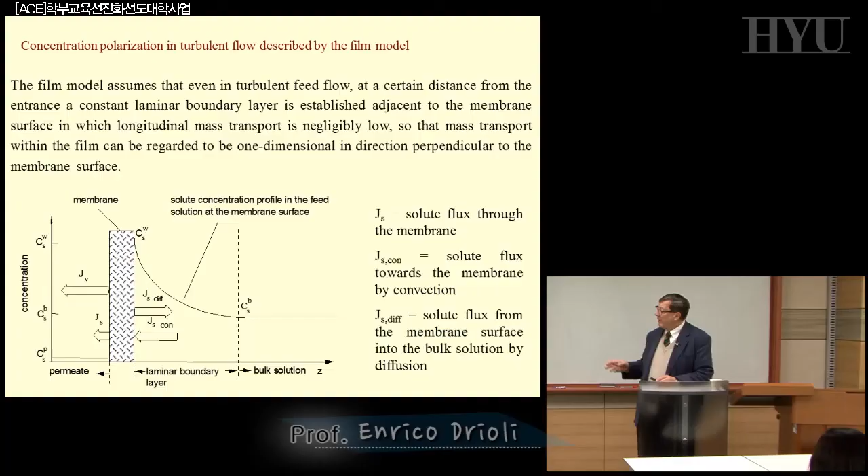We discussed last time the concentration polarization phenomena. We discussed concentration polarization in pressure-driven operations: reverse osmosis, ultrafiltration, microfiltration. Remember that this kind of phenomena is present in any membrane operation.

They can be different in mechanism, they can be different in the kind of phenomena, related to concentration polarization or temperature polarization, but there is no membrane operation in which we can neglect this kind of problem at the interface. We will discuss it also in electrodialysis, in fuel cells, for example, where sometimes people don't consider it. We always have phenomena at the interface which can be very significant and kill the efficiency of the process if you don't try to control them.

We saw that this system can be analyzed in different ways. There are some approximations when you want to solve the problem, and the traditional approximation is the film theory, in which we assume that a kind of stagnant film forms at the interface, and only at a certain distance will we have the traditional bulk concentration. In this region, we will have a linear change in the concentration across the thickness of the boundary layer.

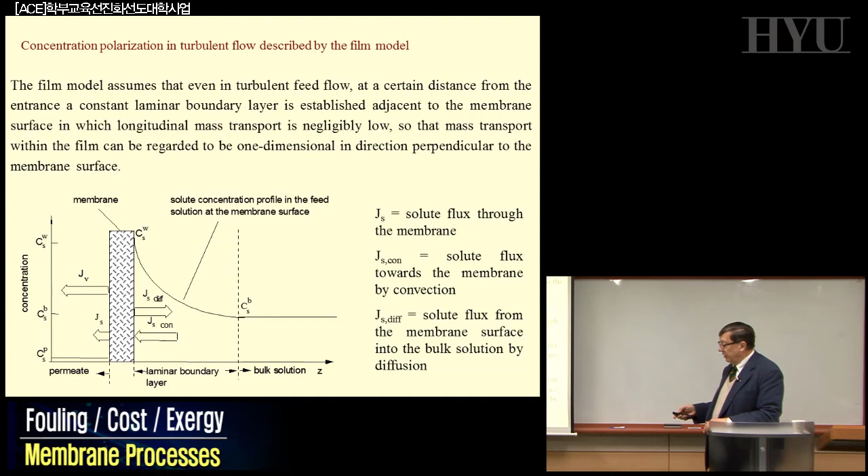We already considered that this kind of problem can significantly affect the performance of your membranes, for example, changing the transmembrane flux significantly. The experimental results show that if you change not the pressure, not the driving force, but just stirring, just mixing the solution better, the transmembrane flux can change significantly. So without changing membranes, without changing driving force, the transmembrane flux can be very different depending on how you control interfacial phenomena. That's a typical example.

By the way, this is the effect in terms of transmembrane flux. But keep in mind that when you are forming a film at the interface, the selectivity of the membranes can also be modified. So it's not only the transmembrane flux, but the overall performance of the membrane, including selectivity, that can be totally different. So these phenomena are quite important, and we have to learn how to control them.

We already discussed that if you neglect any problem related to osmotic phenomena, assuming that the formation of the boundary layer and eventually of an additional film on your membranes, physically a gel or a cake layer, you can assume in a first approximation that the osmotic pressure can be neglected. This additional film does not affect osmotic pressure, which is an approximation that cannot be real in many cases.

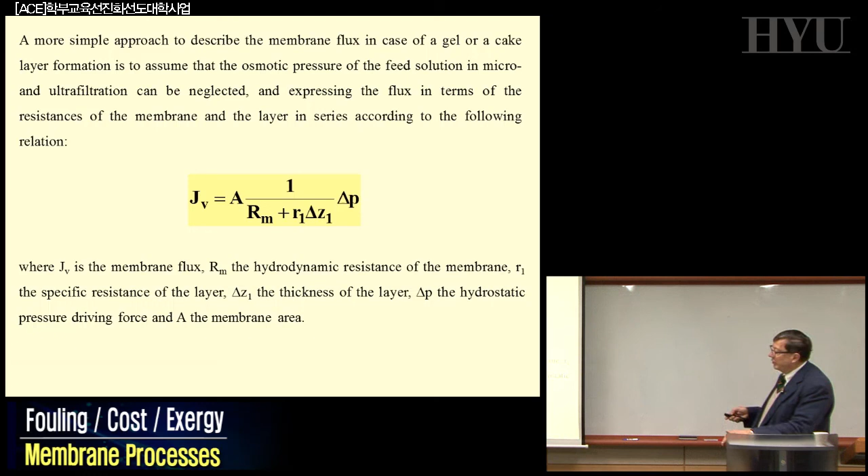This is a relatively simple equation, similar to equations people used in traditional filtration systems, a modified Darcy law, and on the basis of this equation you can recalculate the transmembrane flux and predict the interfacial concentration, etc. The only thing to consider is that, relative to the initial membrane with no cake formation or gel deposition, the new membrane is this one. So you are creating a new membrane where the intrinsic resistance Rm we saw before is no longer the initial one, but you have this additional film.

In this case, again, you can neglect osmotic phenomena, but this is an approximation because the film you are forming can have much more rejection, for example, also for some of the small components in the solution. So the initial membrane, if it was microfiltration or ultrafiltration, had no osmotic problem because everything was going through. But when you create something new at the interface, it can have some selectivity, rejection, also for some ions. So in this case, you can have an additional phenomenon of increasing ion concentration.

You can create this new concentration polarization, which is different from the initial one, and this can have osmotic effect. This seems to be simple. Many plants have been installed years ago in ultrafiltration, for example, that were not running correctly in the dairy industry for this kind of phenomena, because people were not able to predict the selectivity that this kind of gel formation related to some protein in the milk ultrafiltration was creating at the interface, inducing additional osmotic phenomena.

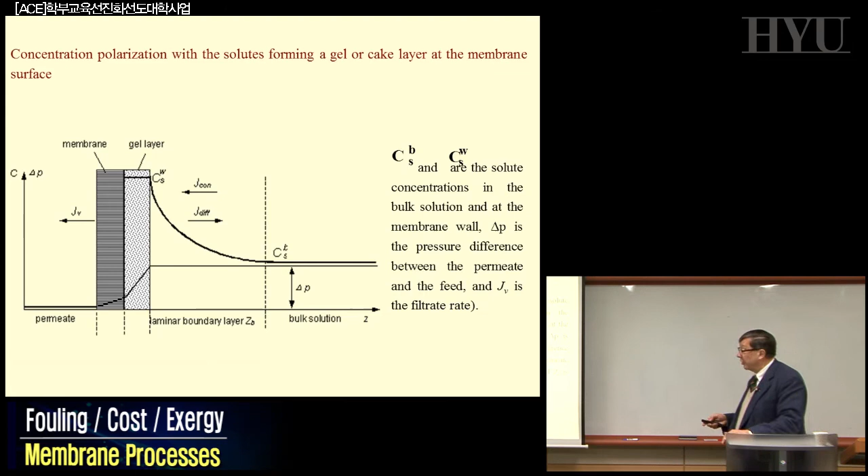That's what was happening in this dairy industry, where different cows were eating different grass. Eating different grass, some of the ions were totally different. People were not aware about this, and the plant was not running. So they had not to change the membrane, but to change the food for the cows that were giving the milk. So a complicated story to understand. Anyway, that is the situation.

And the relationship in this case: assuming that you have mass transport in the laminar boundary layer, in an overall system with turbulent flow at a certain distance from the membrane surface, a relatively simple expression can be extrapolated, in which the concentration of the solute at the membrane interface divided by the concentration of the solute in the bulk of your solution is given by the exponential of the transmembrane volumetric flux times the thickness of the boundary layer divided by the diffusivity of the solute. This thickness is the one controlling the phenomena, as we saw in some experimental results before. So if you're stirring or increasing linear velocity on the membrane surface, you change this term, and that changes this concentration value.

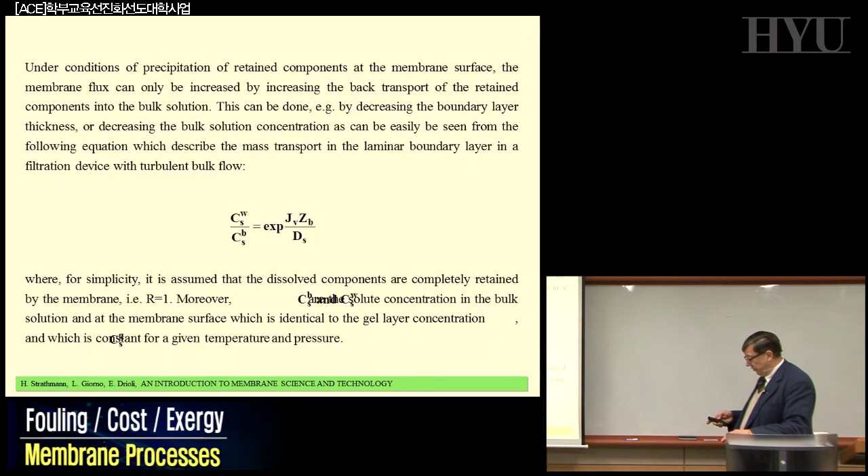Until now, we have been discussing concentration polarization and mentioning that, in relationship to concentration polarization, something can happen also in creating an additional film. This is not really concentration polarization, because concentration polarization is a reversible phenomenon related to the formation of a concentration profile. When you start to talk about cake deposition or gel layer, that is already part of the fouling. And I was mentioning to you initially that fouling and concentration polarization we have to consider as something different. They are different in origin, in mechanism, but very much interrelated.

When we are talking about concentration polarization and fouling, there is one parameter that can be introduced to make a difference between the two kinds of phenomena, and that's what we call critical flux. Critical flux is the flux value below which a decline of flux with time does not occur, while above this flux, fouling is observed. For any operation, it depends on what you have in the feed, and it's not easy to make simulation or modeling. You have to do it experimentally still today. We don't have enough experience to extrapolate a very general model.

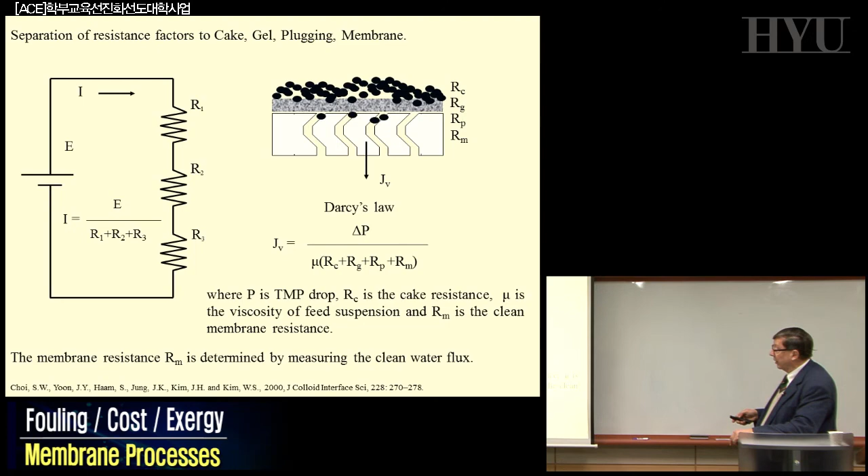You can have resistance related to reversible fouling caused by, for example, a very weak interaction of the foulant, which can eventually be removed by washing or backwashing. You can have irreversible fouling, the problem we were discussing before, caused by strong attachment of foulants, producing pore blocking, cake, gel, biofilm, and this is not easy to remove by stirring or physical methods. This is the most critical one, and in some cases there is no way. If you have made mistakes operating in this situation, at the end your membrane has to go to the garbage. There is no way to recover it.

That's why, remember that in all membrane operations, there is always a pre-treatment. We are talking about ultrafiltration, reverse osmosis, etc. They never work by themselves. When you go to reverse osmosis, before arriving at the reverse osmosis module, there is a significant pre-treatment. The cost of the pre-treatment in running operation is about 60% of the overall cost of your process. So the cost of the pre-treatment can be more expensive than the cost of the RO itself, because if you don't do this, your membranes have to be changed very quickly. The overall costs we will discuss later already include pre-treatment and today also post-treatment, because this is an intrinsic cost.

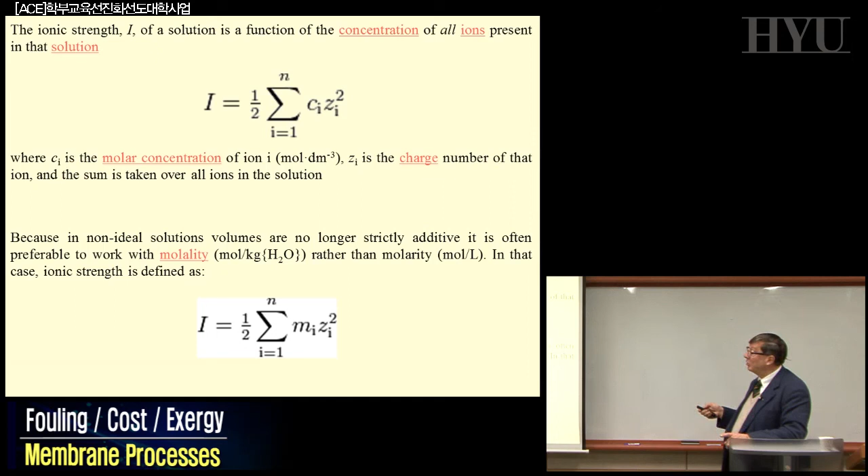And it is related not to the concentration, it is related to the ionic strength. It is related to the concentration multiplied by the square of the charge of the single groups. So this parameter is the important one, and it's better you remember, when something is not clear, that it is not a concentration effect, it's an ionic strength effect. That means concentration multiplied by the square of the charge of the single ions. And that can change significantly the story.

Before, we have been discussing a little bit about fouling related to any kind of simple compound, can be electrolytes, can be high molecular species, can be a protein, etc. There is one fouling that is the most terrible today for us, still not well understood, and still present, and that can kill your process sometimes, which is biofouling. Biofouling is a fouling related to the interaction between biomolecules and the membrane surface.

A typical example: in most of the solutions, the water we are treating, river water, brackish water, seawater, there is always some organic compound. A typical example is humic acid. And this system has a complicated chemistry that people today are slowly studying to understand how it can affect our membrane performance. It's not just the presence of humic acid. It's the fact that humic acid can easily interact with metals present in the water. And depending on the metals, you can have different kinds of behaviors.

Simple case, you can have this humic acid interacting with sodium. You can have a very weak interaction forming this kind of complex. And this kind of system can deposit or interact with the membrane surface.

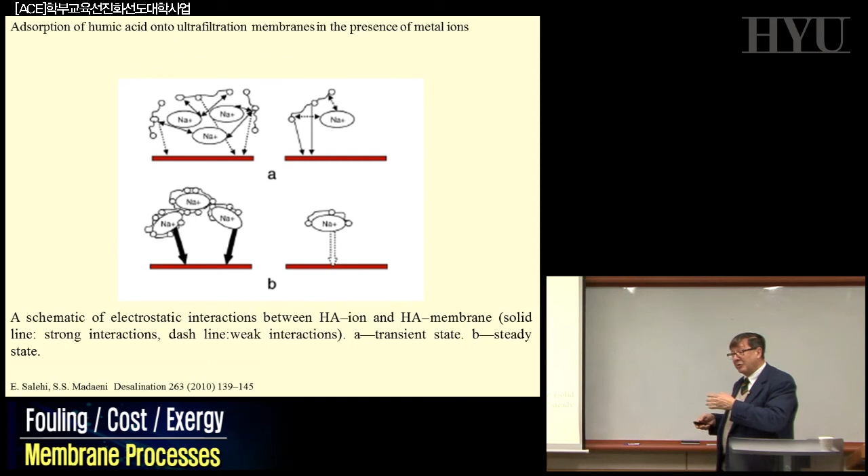At the origin of what is also called biofilm. Biofilm is something that happens everywhere. In our body, we have a lot of biofilm. Some of our diseases are sometimes just related to the creation of biofilm in some part of our system. So biofilm is complicated. What is worse is that in some cases it is not just adsorption or desorption.

What is happening is that, particularly in microfiltration, in ultrafiltration, but also in reverse osmosis, you can initially have in your system some bacteria, some microorganisms, a few of them. After microfiltration, after pretreatment, everything is clean. You can drink the water, no big problem for your health. But still you can have 1 or 2 or 3 of these bacteria present somewhere, or they can penetrate somewhere.

And what happens is that initially they go on the membranes, and they can be blocked on the membrane, also physically, because, for example, in RO, they cannot go through. It's a dense membrane, no way to penetrate. The same can be in ultrafiltration. They can be deposited on a pore. And initially nothing happens, because on your big membranes there is one bacterium blocking one pore, or just reducing a small available surface in RO. Nothing happens. Your flux is still basically constant.

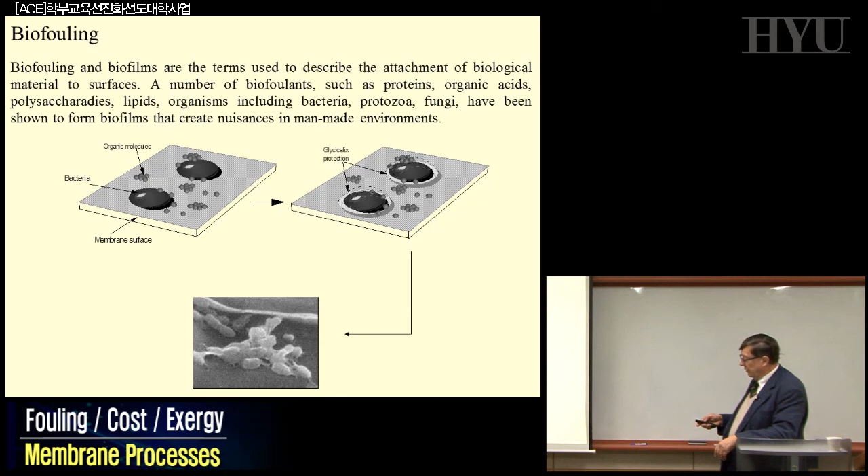But these bacteria, if they are microorganisms which are still active, live on the membranes. They can start to eat and use the membrane itself or some of the nutrients present around for growing, producing and developing something that at the end becomes a film. And when this happens, they start to live and produce what are called mucoglucosaccharides.

This term here is EPS, extracellular polymeric substances, which are normally also biosubstances. Mucoglucoside is one of the most traditional terms. And when these things happen, you can have some simple bacteria associated with some of these extracellular polymeric materials. And they have a complicated behavior; you must be a microbiologist to understand what is going on.

They can interact in a very strong way or in a very weak way with the membrane surface, and this complicates the life of these things. You can have detachment, decomposition. You can initially accumulate and after you just redecompose. But basically, they live on your membranes. Initially, when there are only one or two of these, no big problem. Sometimes they are one or two.

But when they start to accumulate and penetrate and produce more of this extracellular polymeric substance, such as this mucoglucoside, they can go into the membrane itself. At this point, you see something. Flux decay is still going down, no more constant, and there's nothing to do. You have to take your membranes. There's no way you can increase axial velocity or stir more, etc. Big washing, nothing. Take the membrane, put it in the garbage, and put in a new one.

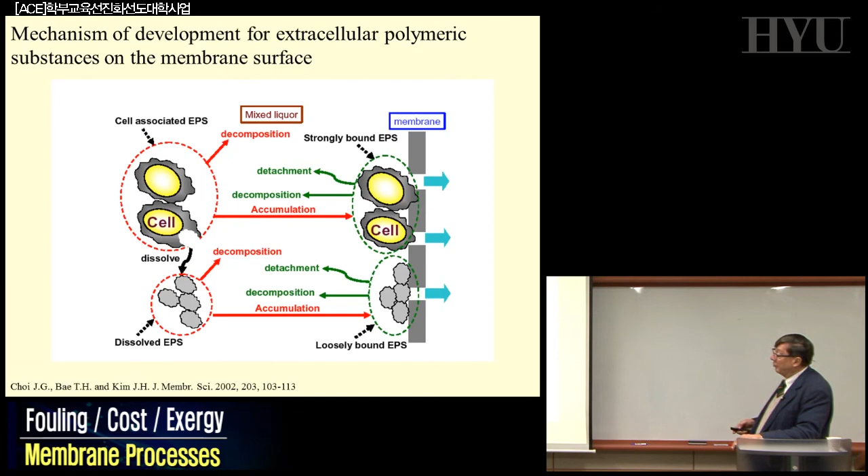And these things don't happen shortly. They can happen after 1 year, 2 years. Biofouling can appear also after 3 years. And when it appears and you realize there is biofouling, you are losing 20% of your capital investment because you have to change the membrane. You cannot recover anymore. On the contrary, recovery is possible when it's just normal fouling or concentration polarization, which we learned is reversible, so there's no problem.

Normal fouling, normally you can clean. There are different ways. You can clean chemically, you can clean physically, etc. But with biofouling, you can do nothing today. In the sense, we don't know how to do it. We will see how these people are trying to understand more, and some progress has been made, but still we don't have any real standard solution.

When you're doing this work, you have to try to measure the quality of the water that in principle at least is not giving fouling. So you want to be sure, because I told you that 60% of your pretreatment is to avoid any fouling in ultrafiltration and particularly in reverse osmosis. Again, it's not easy to predict and evaluate scientifically what is going to happen in the system, because there are so many variables. You can have different concentrations, different species, etc. However, some standard ways to predict if your system will have a fouling problem or not exist.

One of these is what was traditionally called the Silt Density Index, SDI. This has been standardized worldwide without really understanding what membranes are, but people accepted the idea that there were some numbers. When this index is lower, normally about 3, 4 in some cases, meaning a value between 0 and 2 or 3, the water in principle is good for going, for example, to traditional RO membranes. When it's higher than 3, 4, you must have a problem. You have to improve your pretreatment and so on. This was the previous index that has been accepted.

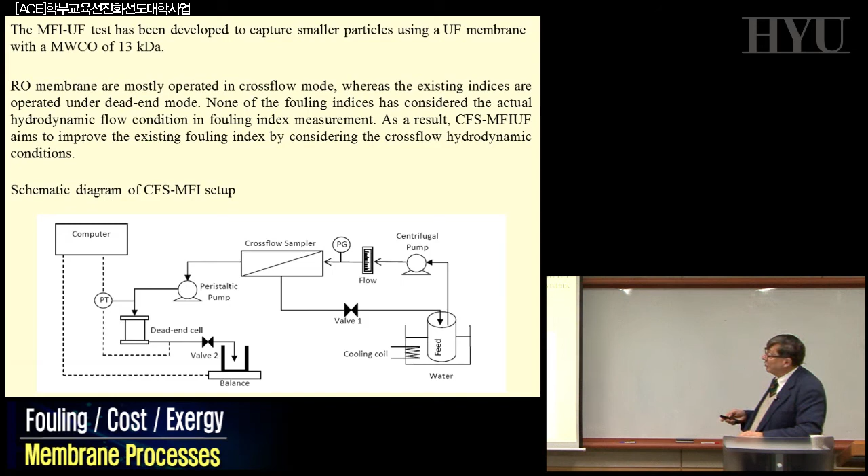How to control concentration polarization and fouling, and possible subsequent fouling, we already discussed a little bit. A turbulence promoter is one way of doing it, and there are different kinds of turbulence promoters, by the way. You can have an artificial turbulence promoter, something that you include in the system, but some of the membranes in operation today have intrinsic turbulence promoters.

If you read the literature, you'll find some people from the Toray company. Toray claims that their membranes are the best because at the membrane surface, at the nano level, at the molecular level, they have some small protuberances just on the surface, and they claim that the good performance of their membranes is related to these protuberances, which act as internal turbulence promoters. Each of these protuberances, when the fluid arrives, creates some vortex, and that is a way to enhance the efficiency of the system at the molecular level.

You can have a corrugated membrane surface, which approaches the idea of the protuberances of Toray. You can also have some external effect. For example, you can have pulsing of your solution entering the system. Pulsing means that with the concentration profile and the level of concentration, you never approach the critical transmembrane flux, because you always stop before arriving at a critical value.

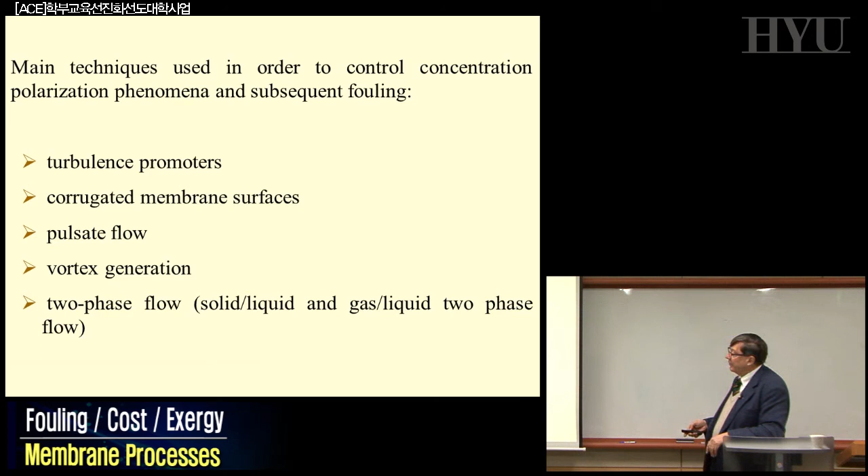One of the best methods, in the end, is backflushing. Not all membranes can operate with backflushing. In ultrafiltration, microfiltration, and in some cases nanofiltration, you have your solution running inside your tube. This is a capillary membrane, for example, and you can accumulate something on the membrane surface, particularly if you have some particles in suspension, etc.

Now, what can we do when this becomes severe and you have flux decay? You have your transmembrane flux as a function of time, it starts to go down, and if you don't do anything, down, down, down, you will quickly foul your membrane completely. What you can do is, after a certain period, and that's something you have to learn by yourself depending on your solution, every second, every half an hour, every 5 hours, you can backflush. The water that was coming through, you move to the other side and pulse it back through the pores.

The frequency of this backflushing is something everybody has to learn by himself, depending on the quality. In the end, instead of this kind of behavior, you will have this behavior: you backflush, the flux goes up again, then starts to go down, and if the frequency is appropriate, you will keep an average value of this kind, and it will never arrive down here. This is very well utilized today in most ultrafiltration and microfiltration systems, and it works very nicely.

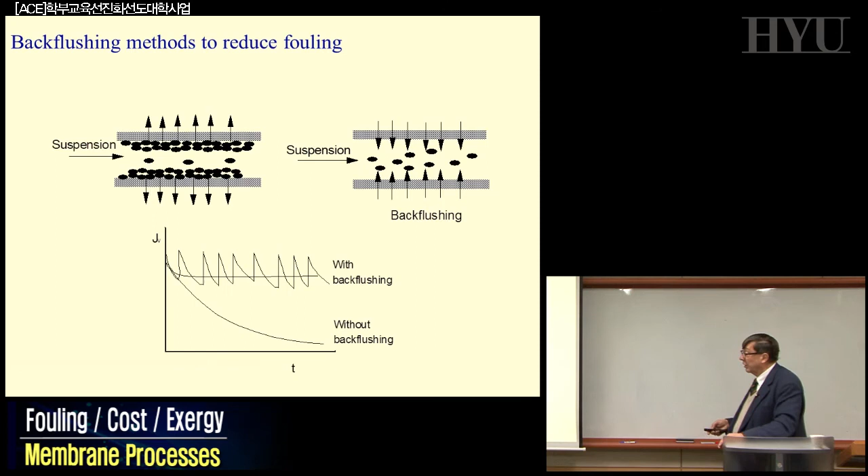Let's go back a moment to biofouling, because again, this does not work for biofouling. It works for any traditional fouling, but not for biofouling. Biofouling can eventually be minimized with this technique, but if something happens with the extracellular polymer being produced, you kill your system. As I told you, you lose all your money changing the membranes.

There are different, more sophisticated ways to protect, particularly against biofouling. One is increasing, for example, the hydrophilic character of your membranes. Depending on the kind of interaction that exists, or the kind of bio compounds present, you can functionalize the membrane surface; in general, making it more hydrophilic by chemical treatments is the right way. You can have coatings or just functionalizing. You can induce some carboxylic groups or aldehydic groups, etc. And you can create a situation in your traditional polyacrylonitrile membrane, for example, where you block some amino acid or something on the surface.

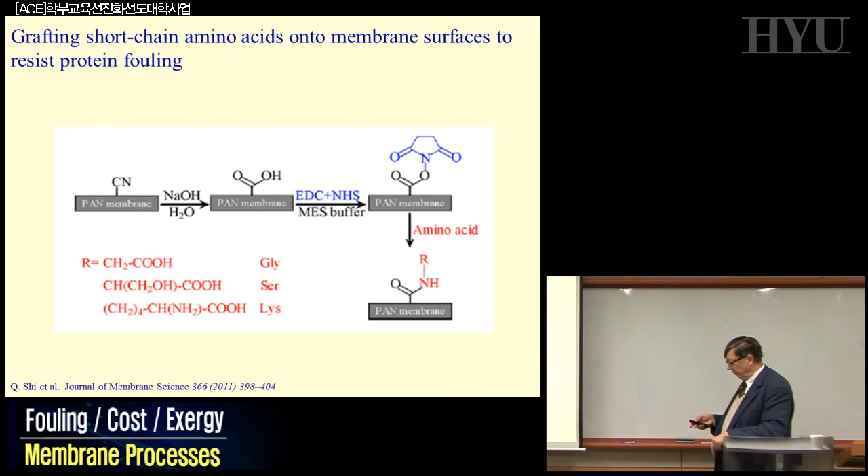That will decrease the possibility of interaction, eventually creating some repulsion for the species at the origin of the fouling. What is more interesting today, however, if you are doing this, this is the end of the story where we are now today.

Again here, this is the result that you can have in terms of chemical treatment. There is a lot of pre-treatment just to clean your membrane chemically, and different kinds of solutions have been tested. Now, in this case, this is fouling, you have to interact with the species that have been adsorbed. So EDTA complexing agents is a typical case. SDS is another typical case. EDTA is the disodium ethylenediaminetetraacetate. The sodium dodecyl sulfate is the other chemical, SDS.

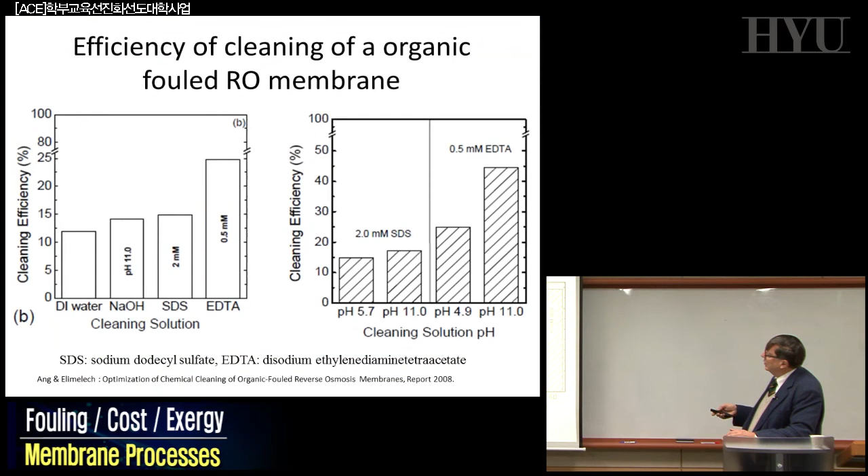And you see here that these are the most traditional ones in terms of cleaning efficiency, and this chemistry functions differently depending, for example, on the pH of the solution. The behavior, complexation and decomplexation depend on the ionic strength or pH of the solution. But today, the most utilized are complexing agents such as EDTA or SDS. And here, again, this is for membranes cleaned of organic fouling. There's organic and also inorganic fouling. Anyway, there's the same kind of result for everybody.

The one I was looking at is the new approach where people are doing research today: how you can try to minimize not the traditional fouling, which for the most part can be solved, but the biofouling. There was an interesting idea originated here in Korea, not too far from here, at Seoul National University, where researchers, chemical engineers, trying to understand the mechanism of biofouling formation, arrived at an interesting point: for forming a biofilm, if you have one or two bacteria initially present, the origin of the problem is not one or two. It's the fact that one or two become 1 million or 100,000.

So they grow. For growing, in all the systems we know, we have to communicate. These bacteria have to communicate with one another. They have to recognize each other, interact, and start to proliferate and live together. They have to make a colony. So one way to avoid this is: why don't we try not to destroy the bacteria, but to avoid the communication? Let's try to block the possibility of these bacteria to interact, talk to each other, recognize each other, and start to grow.

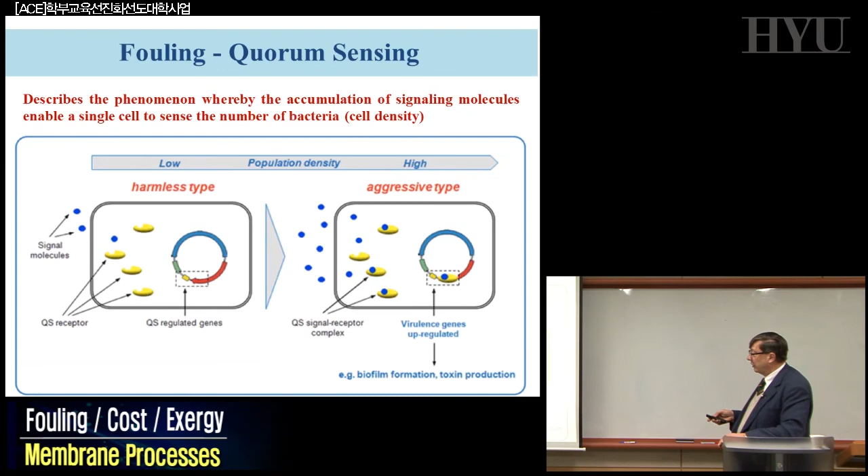And that everything, all the phenomena, are a function of the population density that can be at the origin of the propagation and growth, etc. But now, for what we are concerned, people realize that if you identify, for each kind of wastewater, this kind of microorganisms which are present and

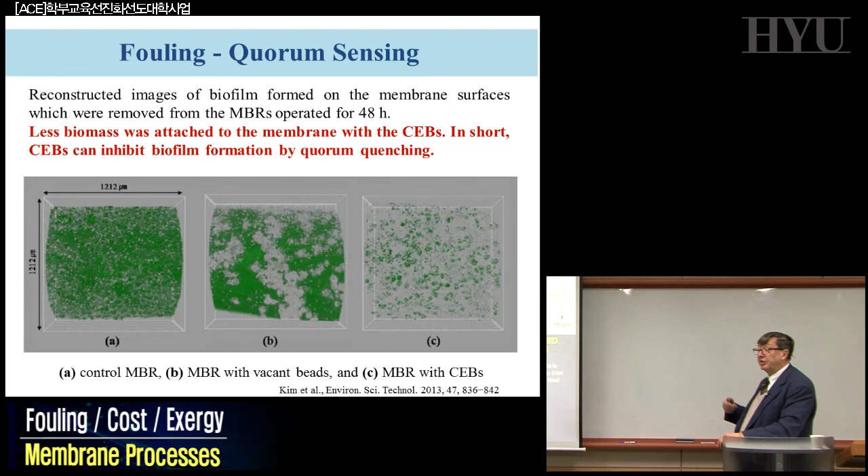Still part of the research activity in progress, but quite an interesting area of research, because if you're interested, you can go and talk with some professor here in Seoul, and they will explain in detail what is going on. There was a meeting a few months ago in Gunsan, only devoted to this, with 100 people taking part. And there are nice proceedings. If anybody is interested, ask for the proceedings of this last meeting, and you will find a lot of updated information on this line of activity. Quite interesting.

Just a few comments to finish with this part of our program. First of all, how we utilize our membranes. Simple system: you have different possibilities to put together your module. One is just to use a batch process. We don't like it. It's very unusual that we are working in a dead-end flow and batch system. One of the interesting advantages of membrane operations is that we are making everything a continuous process, moving from batch system to continuous system. That is one point that's very important for process engineers.

In some cases, for example in some fermenters, it's still necessary to use a batch system. But in general, you're going always to a continuous system. That means, as we discussed many times, you cross-flow on the membrane surface and apply your driving force across the membranes, because doing it this way you can always try to keep the concentration at the interface equal to the one in the bulk, to avoid concentration polarization, formation of cake or gel, and all the concentration and fouling problems.

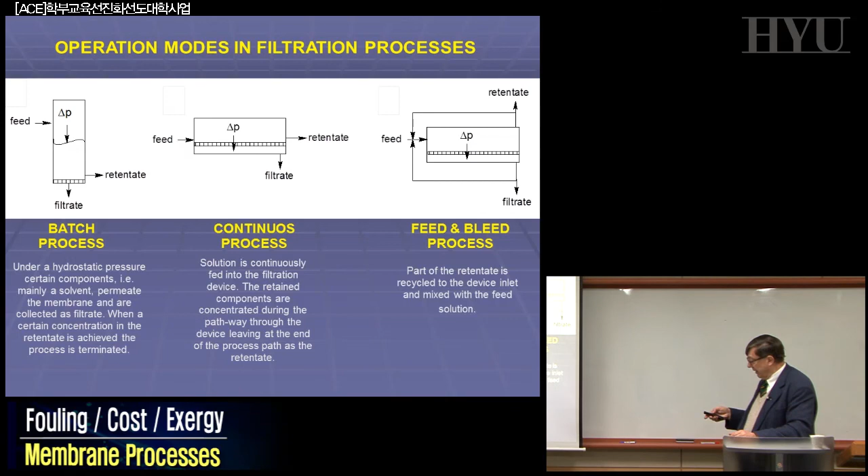Obviously, when you have to work with 3 million square meters of membrane installed, it's not one or two modules that you have to operate. There are 30,000 modules, 45,000 modules in some plants. In this case, it's no more the job of chemists, it's the job of very expert chemical engineers or process designers. This is a modular system. Modular means that you are assuming, and it is true, that for each of the modules in your system, the properties for obtaining the right performance are the same in terms of entrance pressure, output, the pressure drop in a single module, etc.

For doing this, you have to try to combine the modules at the best. You can do it putting some stages in cascade, in series. What is going out from stage 1 becomes the feed of stage 2 and so on. Or you can put together in parallel and in cascade different tracks. So in this case, these are in parallel and these are in series. And again, this configuration gives you the possibility to treat in a modular way. That means all the modules will have the same parameters at the entrance and at the exit, basically.

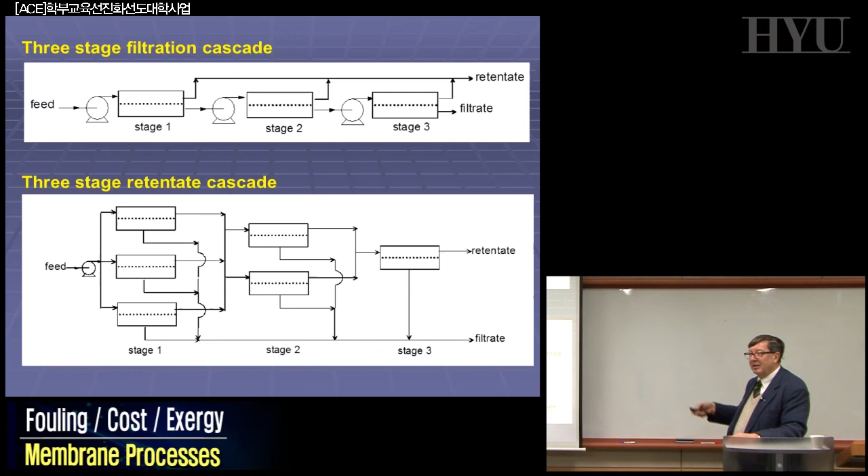When you have 30,000 modules, the system is a little bit more complicated, and it's not our job, but there are people who know how to put together 30, 45,000 modules, huge ones, to obtain roughly the same performance of all of them as expected by the one that you have for one of them. And that's quite interesting, and only membrane engineering can do this kind of job. No other system is able to optimize in this way. If you want to scale up a traditional MSF, no way that you can realize something similar today. That's one of the most interesting aspects of the membranes.

Last few points, where the energy consumption comes in our membrane operation. Basically, the total energy necessary for realizing your separation using membranes is based on at least 3 different parts. The first is the energy required for the transport of the filtrate from the feed across the membrane. That is the driving, the number one. The second one is the energy necessary to pump the feed solution through the membrane module. That's the one to arrive to the membranes, and the one that you have to move across. Third is the energy required for the pre-treatment and post-treatment in your system, and all the energy necessary for the instrumentation and so on.

Now, this last one basically is negligible. You can not take it into consideration, except some special cases in which the pre-treatment is very expensive. But the one that we have to consider is basically the one that we use to move the chemicals across our membrane. That is the real value. Now, this is the Gibbs free energy we already discussed in reverse osmosis, in nanofiltration, in other processes, the Gibbs free energy of mixing, which is the minimum energy required for the separation of the components of the mixture, is the real term that we have to calculate. It is a reversible term.

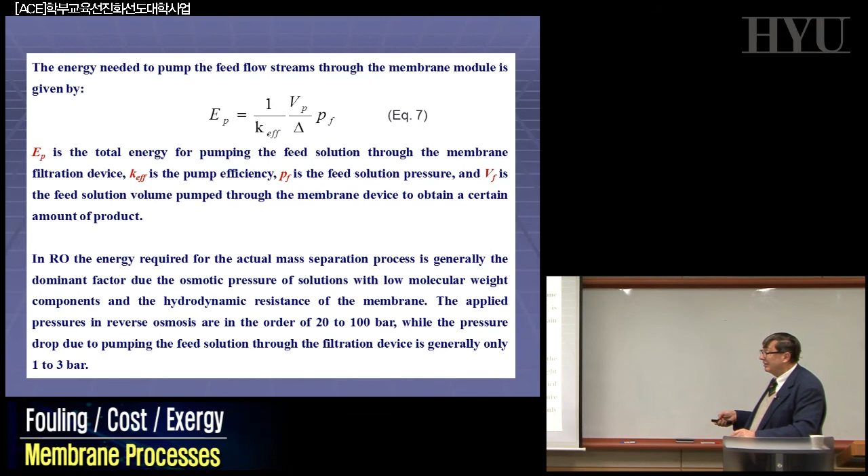Basically, these are the kinds of parameters that we have to control. And today, there are a lot of efforts in improving not just the membranes, but these kinds of parameters for changing the cost. And here you can find, keep in mind, that the overall cost at the end, considering this kind of analysis, as a function of the driving force, the applied hydrostatic pressure, is not linear. And that's another key telling you a lot of work has to be done. Chemical engineers, membrane engineers are working to identify this minimum, which is not obvious and not easy.

The reason for this minimum here, that's very important in terms of cost, is that when you increase hydrostatic pressure, obviously you're, for example, decreasing the membrane cost. Increasing hydrostatic pressure, in principle, assuming that there is no concentration polarization, you are just reducing the membrane surface necessary. So you are decreasing the overall impact of the cost of the membranes on the system. Energy cost obviously is increasing if you're increasing the hydrostatic pressure.

Maintenance cost is also relatively decreasing when you're increasing the pressure, but if you add these three terms at least, assuming that you made the right calculation with the right coefficients, etc., here is the minimum. So if you're working at a higher pressure, the energy is increasing significantly with no motivation. So we have to identify where you are. And that is not easy, and today we are learning more how to do better.

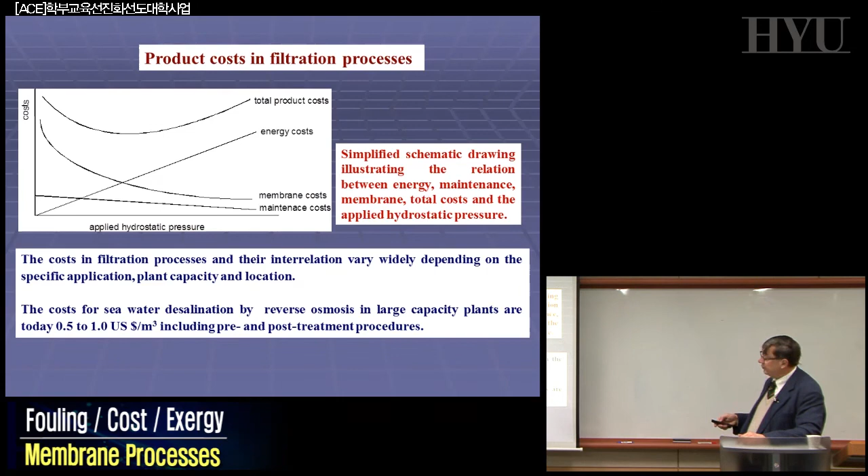If you look here, where are the costs, the overall cost? As we saw before, the real cost is electricity. Electricity means the cost for pressurizing the system and moving the chemicals across your membranes. The cost of the membranes, remember, is relatively low. People sometimes say we need better membranes to reduce the cost of the system, membranes are too expensive, etc. What are you talking about? Membranes, at the most, and today they are still decreasing, have an impact on the overall cost of 7%.

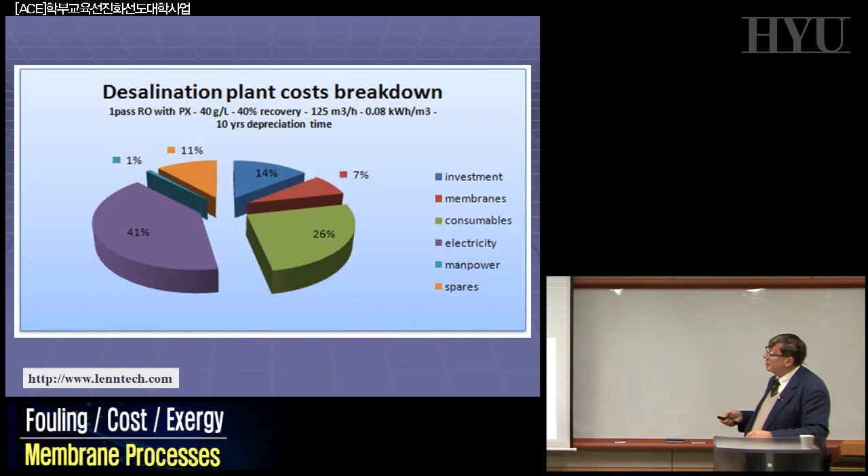The cost of electricity can be reduced in two ways. One is to reduce, for example, the pressure we have to utilize; the efficiency of the pump can be increased, etc. But the other one is to reuse as much as possible the electricity. And that can be done using energy recovery devices. And these are the most important. The ones that exist today, initially, were just the turbine or the Pelton turbine, where you can recover part of it. The solution was arriving at 75 bar in here.

And on the permeate side you have 1 bar. So you have a delta in the pressure of 75 bar, which is lost if you don't recover it. If you recover it, putting a turbine here, part of this energy, not 100%, but if I remember, 60 or 70%, can be recovered, and that will be utilized again in the system. Recently, another way of doing it, not a turbine, but what they call a pressure exchanger, has been introduced.

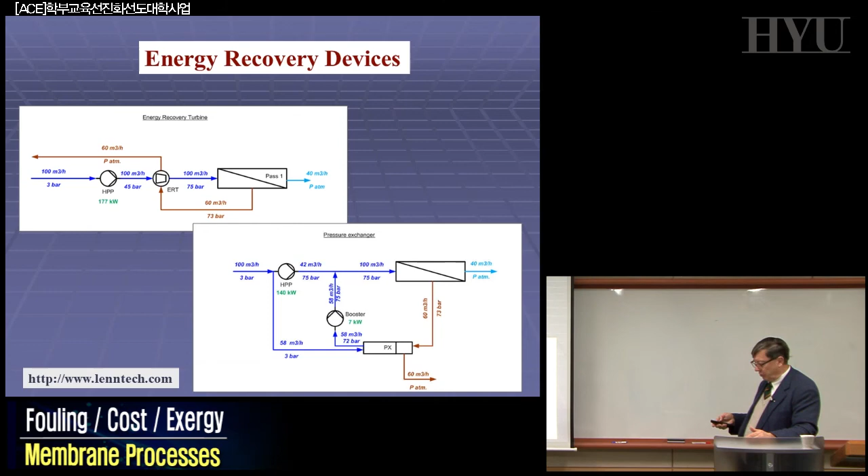The same story. Initially, the pressure exchangers were much better than the turbine. Today, the plants are becoming very big, and the efficiency of the Pelton turbine has been modified and increased for this application because a new market was appearing. And so now, in the competition between the pressure exchanger and the turbine, it's not clear which one of the two to choose; it depends on the situation. In some cases the Pelton is better, in some cases the pressure exchanger is better. But this is a field where there's a lot of progress going on.

You can see here the difference in the cost, which depends on the cost of the energy. Energy is the factor number one, as we saw. 40% of the overall cost is energy, is electricity. Now, the cost of electricity is not the same around the world. If you go to Saudi Arabia, it's a very low cost because they burn everything, they burn oil, no problem. If you come to Italy, it's very high, and the same in some other countries.

So depending on the cost, you have a different cost of the water you are producing. It does not depend on the cost of the membrane. We learned membranes are 8%, 7%. The real cost, 40%, is the cost of electricity. And roughly, today, when the electricity is cheap, you are working around less than 0.5, 0.6 dollars, really euros, but I remember the number in dollars, for a cubic meter, for 1,000 liters. So quite an interesting number. But the cost depends also on the reuse that you can have.

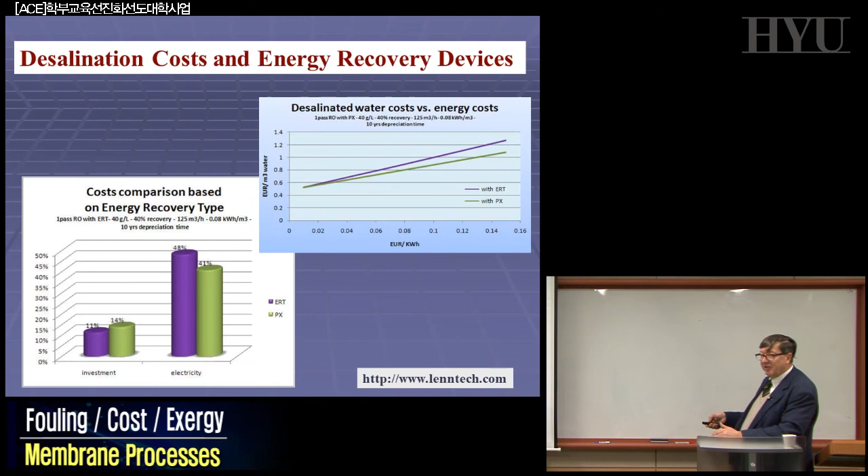You can see here, using a Pelton turbine, you can gain about 20, 30% in the cost at the end, particularly when the cost of energy is increasing. And when you compare the different kinds of recovery system, the turbine and the pressure exchanger, the efficiency still is around 41% against 45, if I remember, 48. So there's still competition. It's not a big difference, but this is an area where every day we have progress. When you go to the next meeting of IDA, the Desalination Society, you will find better pressure exchangers, more efficient Pelton turbines, and that's what can make a real difference on the final performance.

Let me use 2 more minutes, so we close this session, and we will discuss what exergy is. Until now, we were talking about energy, energy, energy. Forget about energy. You have to learn more and more that when you make this kind of evaluation, what you have to consider is not energy, it is the real part of energy that you can utilize in doing your work, which is not energy, it is exergy.

Normally, the total energy is formed by exergy and anergy. Now, anergy is the part of the energy that is forced to be given to the environment as heat in conditions of complete degradation. It is lost irreversibly. And sometimes you just assume that you can recover it, reuse it, etc. Forget it. This is the part that is going, it is irreversible. What we are really interested in, where we can improve the system, is the component which is exergy.

Still, in many departments of chemical engineering, when the secretary is typing a report and you write exergy, she makes a correction, puts an N, and says, well, what are you talking about? She does not have to correct it. Exergy exists, and more people have to become experts in how to calculate not just energy, but from energy to calculate exergy. That means calculating what are called the exergetic losses of the system. Because if you identify where the exergetic losses are present, you can identify where you have to put your money to improve the energy quality of your system. And that is not a question of energy, it's a question of exergy.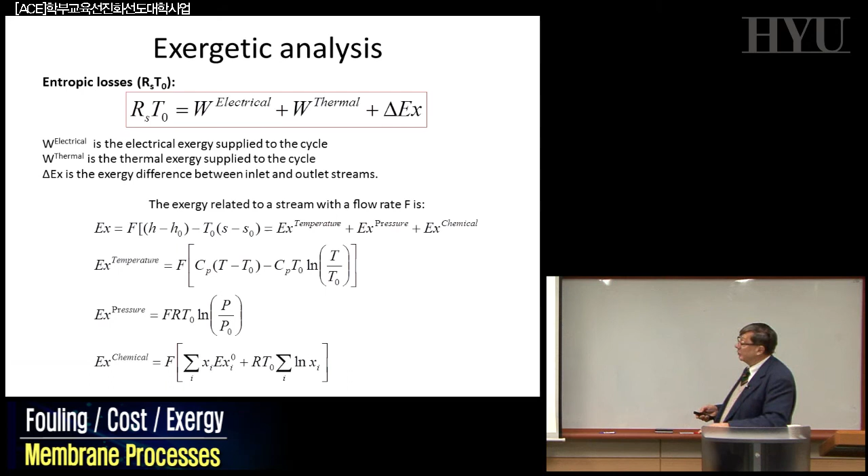In principle, you have to do more than this, because if you want to really analyze the benefits of this kind of technology compared to the traditional one, and they are very, very different, very often you cannot use anymore the traditional metrics that people have been using until now. We are teaching our students and our younger colleagues doing research to use new metrics appropriate with the definition of process intensification. Because process intensification is the umbrella under which we are making all this kind of work. But in process intensification, the metrics are different, the understanding of the problem is different than in the traditional one.

For example, we are not talking anymore about mass. We are talking about mass intensity, that means the ratio of the total mass with the mass of product. We are not talking about energy. We are talking about energy intensity, total process energy divided by mass of product. We are talking about ecotoxicity that people were never connecting to the energy consumption. Today, the eco problem is a cost. If not considering the environmental impact, the eco-environmental factor, at the end of the story, the cost of your product will be 10 times higher than the one you are considering.

So you have to start to make your calculation introducing ecotoxicity, introducing waste intensity, introducing safety. Safety is a cost today. In the past, it was not. A good company was investing in safety. The other one was bad, was not investing. Today, you cannot start a new operation if you don't spend money on safety. So this is a real cost, exactly as electricity. It's exactly as the cost of the land. So it cannot be neglected in the overall calculation. Today, very often, people don't consider safety a cost. Safety is a cost,

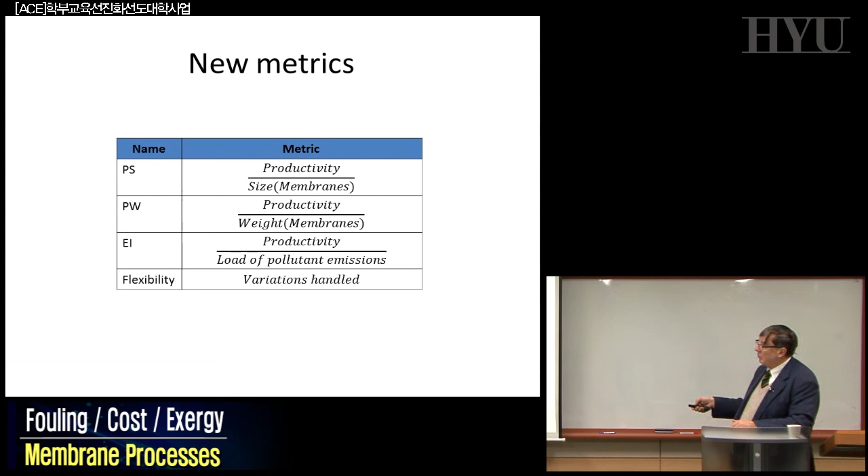exactly as electricity. So all these new metrics, and more than these are coming. We also introduce what we call flexibility, for example, modularity. All these parameters, typical of the process intensification strategy, are real costs that have to be considered and introduced, particularly when you develop this new kind of operation. And here are some of them. We call this productivity, productivity of the system compared to the size of the plant, productivity compared to the weight of the membrane, productivity compared to the load of pollutant emissions, etc., flexibility, etc. Okay, so you will find more and more these kinds of units.

Okay, with this we stop for the moment. We have been covering until now, quickly, I have to say, much more quickly because we have just half the time available, the pressure-driven membrane operations. From next time, we'll start to talk about a different kind of membrane operation, the electrochemical membrane operation: fuel cells, electrochemical membrane devices, blue energy or electrodialysis. And following, we will cover other kinds of membrane operation: membrane contactors, membrane distillation, membrane crystallizers, membrane dryers, membrane condensers, membrane emulsifiers, etc. Okay? Thank you.